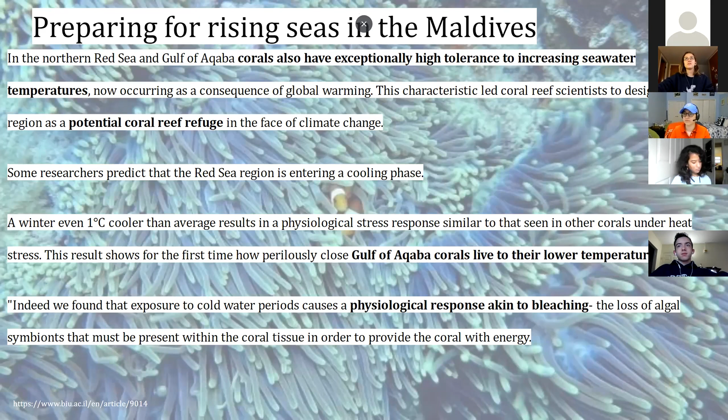So I wanted to talk about this article. They were basically talking about how climate change is affecting coral in the Red Sea. Coral is very temperature sensitive, and for the most part coral has been having a lot of issues with rising temperatures. Very slight temperature changes will cause lots of issues in the coral.

But these scientists were studying a specific area in the Red Sea where coral has a much higher upper temperature limit. They're much more resistant to temperature change. So they were doing testing on this, and they found that this coral had adapted to these higher temperatures. But now if the temperature drops even a single degree Celsius, that would cause something called bleaching of the coral, which basically doesn't allow the coral to absorb energy.

And they were saying this is an issue because, obviously, climate change is not just global warming, it's global weather changes, it's more erratic weather. So there's a higher chance of much warmer and also much cooler temperatures. They were pointing this out as an issue for this potential refuge, as they referred to it, for coral.

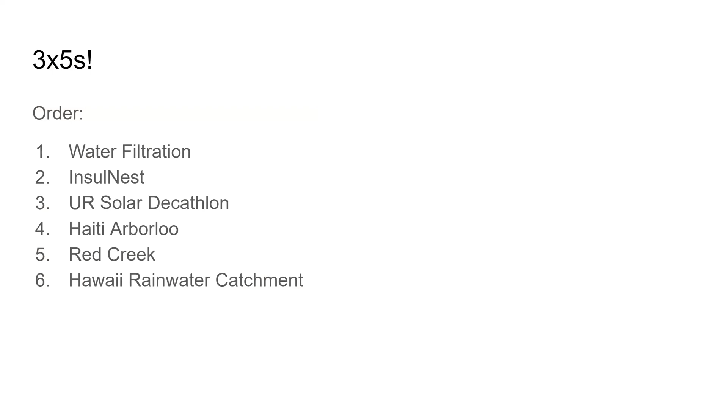Okay, hi, so this is the project for water filtration. Next slide.

So basically a brief overview, I went over last time as well. We're partnered with TAM Ceramics to create a water filter suitable for household use. The desired flow rate is 2 liters per hour, and we want the consumer product to ultimately be less than $10. TAM Ceramics gives us the filter media, and the company itself is promoting safe drinking water in nations that necessarily don't really have that resource.

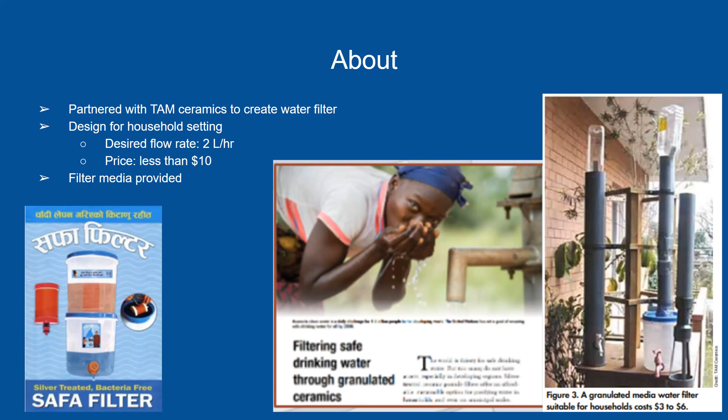Next slide. So progress so far is that we've finalized an initial design that we're using. I managed to actually get to the storage unit and get some of the materials we had last semester, which is the middle picture. I'm in the process of waiting for some materials to arrive to do some more testing. The picture on the right is a method to hold the filter media, which is the bag right there, to contain it and be able to filter water out. And the picture on the left is the mesh screen that we're going to purchase. Next slide.

Yeah, I did want to ask, going back a slide, what's the sizing of your mesh? Because that looks pretty darn small. Yeah, it's 120, it's really small. The stakeholders specified that it had to be 100 mesh or less, and the nearest one we could find was 120. 100 mesh they didn't sell, and we couldn't do anything like 90 mesh and stuff, or else the filter media would leak through.

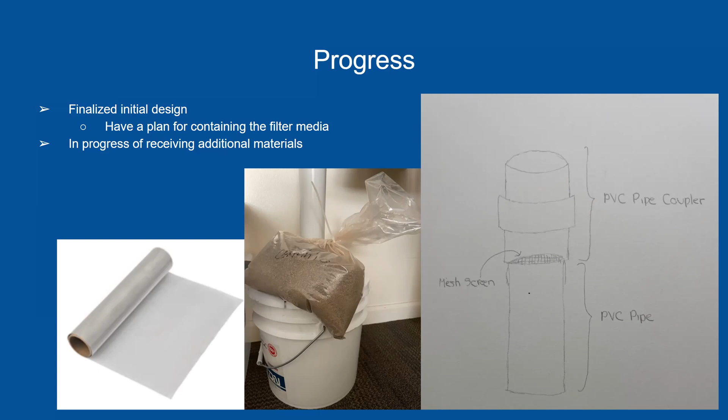Hello, can you hear me all right? Yep, you're good. All right, cool. Hey guys, InsulNest, I think I'm the only one who's here that's on the team.

Anyways, if you're unfamiliar with the project, we are trying to make sustainable organic building thermal insulation material. So the current iteration of the project is focusing on mycelium, which is the root structure of mushrooms. With mycelium, it's basically a network of mushroom fiber growing and bonding whatever your substrate is. In this case, we're using hemp pulp.

As you can see in the middle, towards the bottom, that's one of our samples. On the right, you can see we were processing one of our samples. We tried to light it on fire, because it's organic it does tend to burn a little bit more easily than things like fiberglass. So we tried to light it on fire, it doesn't want to burn. It sort of self-extinguishes, but it still would char. We also tried to laser cut it, so it would char and smoke, so a little bit of room for improvement there. We ended up just band sawing the edges off to make a uniform rectangular shape for testing.

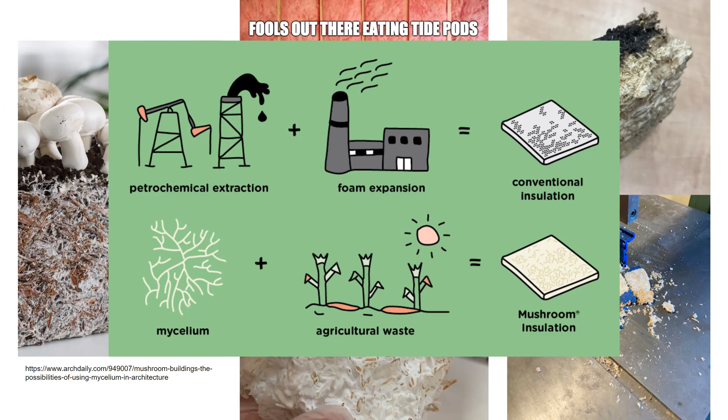All right, so we wanted to figure out the thermal conductivity of our material, of our sample, to really figure out how good it is as an insulation material. So on the left, you can see this theory, the derived formula for the thermal conductivity as a function of the heat rate, thickness of the material, the area of that material, and the temperature change.

The picture in the middle is our team, part of our team, and then our actual setup, which is the physical execution of this schematic on the right.

So heat flows from hot to cold. In this case, from the hot plate, which is 100 degrees, to the cold water, which is roughly at like 25.

So we just waited for everything to reach steady state, so we can have a one-dimensional steady state thermal resistance analysis. It sounds more complicated than it is. So the math is kind of simple.

We were able to back out the thermal conductivity of our material with the help of a reference material with a known resistance value. In this case, it's foam board, which has a thermal conductivity pretty much the same as air. So the thermal conductivity of our material is about 0.03, almost exactly 0.03.

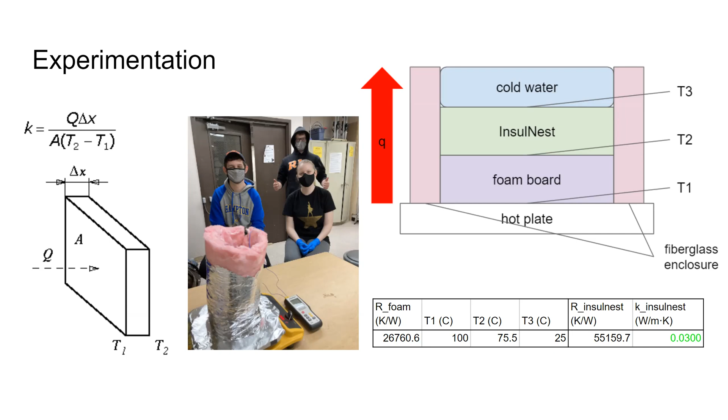So how good is that? For reference, could you go to the next slide? A lot of the insulation materials on the market have a thermal conductivity of 0.04, more or less.

So this is to say that our material actually performs better than a lot of the stuff out there. But our material costs under $20 to make, so instead of a whole factory, it can be made pretty much in a DIY setting. So the cheapness of that, the ease of production makes us stand out in applications like warmer countries with not as much economic power to mass produce foam insulation.

Or like the chemical sort of insulation, they can have that, or countries where buildings are knocked down by natural disasters a lot. So because of that cheapness of production, you can replace your foam insulation with this type of material, which, although it's not as fire retardant, is a lot cheaper to make and a lot better for the environment.

So we did a little bit of analysis to figure out what if we can add an air pocket to it, modeling the air pocket basically as a solid and using the thermal conductivity of air, assuming that there's no convection. Now, of course, convection is going to kick in the bigger the air pocket grows.

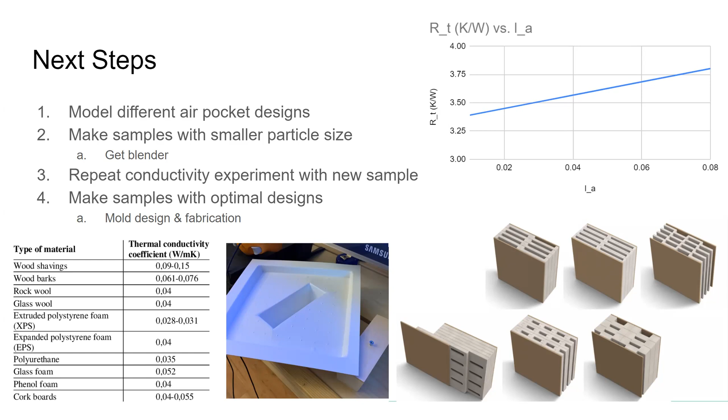Thank you guys for coming tonight. Hey, thanks for having us.

So yeah, this is the University of Rochester Solar Decathlon Design Challenge presentation. I'm Avni, a U of R student, and I'm joined by Humphrey Kimani, another U of R student and team member. Our design is You Are Home, and we partnered with Habitat for Humanity International and our local chapter in Rochester, Flower City Habitat for Humanity, to modify one of the standard designs into You Are Home.

Next slide please. So we first had to determine the target market, and it lies at the Josana neighborhood, that's where Flower City Habitat often builds homes. So we designed a 4-bedroom house, intended for up to 5 occupants. During the design, our main goals were simplicity, affordability, and sustainability and energy efficiency.

Simplicity in the sense that we had to make sure the design can be built by volunteers, because our partner, Flower City Habitat, normally deals with volunteers building everything from scratch. So we wanted to make that as simple as possible, and all rooms and main living areas should be designed with a lot of space so that wheelchairs can move freely.

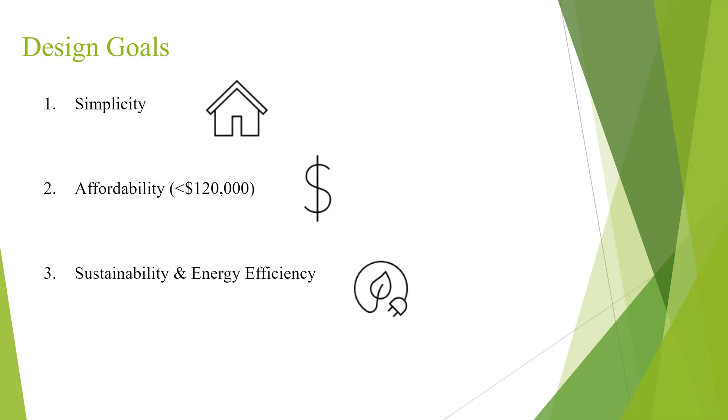So we employed a decision matrix to help us pick the most sustainable materials for those parameters.

The original design had hot water fixtures spread throughout the house, and by moving the bathrooms closer to the hot water heater, we minimized the heat losses associated with water traveling to fixtures spread throughout the house, therefore minimizing the energy demand of the home.

Next slide. So to conclude, UR Home gave a HERS score of around 40 without the renewable energy system, and 10 with an on-site solar system.

Primarily, our design had a community-based solar idea in mind. However, because we used Ekotrope software and that parameter cannot be embedded in it, we just had to use on-site solar, which gave us a higher score of 10. We anticipate the score could be much lower than that because community-based solar has proven to be even more effective than on-site solar.

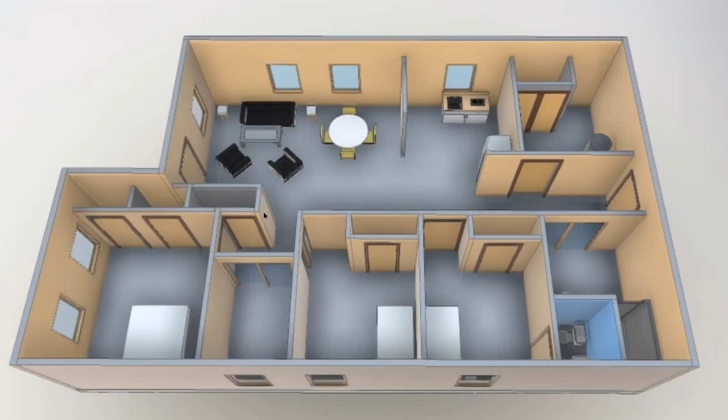Hi guys, I don't know what's going on with my font there, but that's okay. I'm Renee, I'm the project leader for Haiti Arborloo, and I'm going to tell you some updates that we have with it.

So basically, we created this sustainable, affordable, collapsible latrine system for rural parts of Haiti, so that we don't have to build something that withstands natural disasters, we have something that can avoid natural disasters. Right now there's a problem where the systems that they currently have are being destroyed by natural disasters, and it's too expensive to rebuild them afterwards, so this is our solution that we've come up with here.

Right now we're working on some concrete testing still. We did set up a lot of molds at the end of last semester with hopes that we would be able to test out those different compositions this semester, but it turns out they didn't set correctly when we pulled them out from the lab. So we still need to get some new testing materials in order to test them again and find a time that works for everyone, so we're kind of on pause with this one right now.

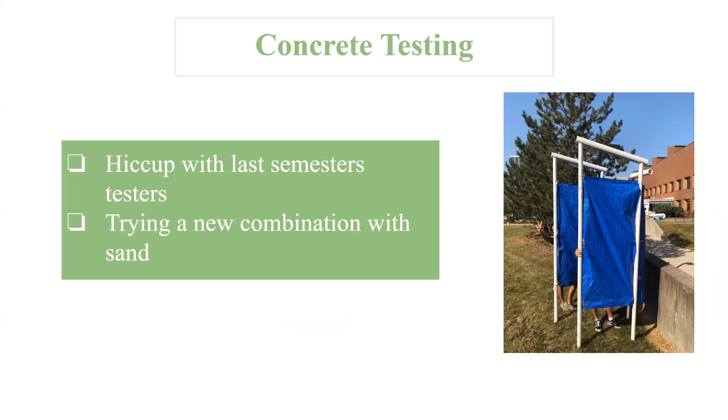Actually, I want to go back and look. Do you guys have... I don't see the door here. I know you guys have done that though. I'm curious about the hook. Can you see my mouse? Yes, I can. I'm curious how you did the hook, what material that is going to be made out of.

So we figured out a way that we could make it out of bamboo for the design in Haiti, but for the prototype that we built here, I believe we just used a metal S hook, and we were able to drill it into the PVC. On the other side we put in an eyelet because we couldn't drill into the PVC the way we wanted to. So that's how we're compensating for it with our materials here.

Gotcha. All right, any other questions?

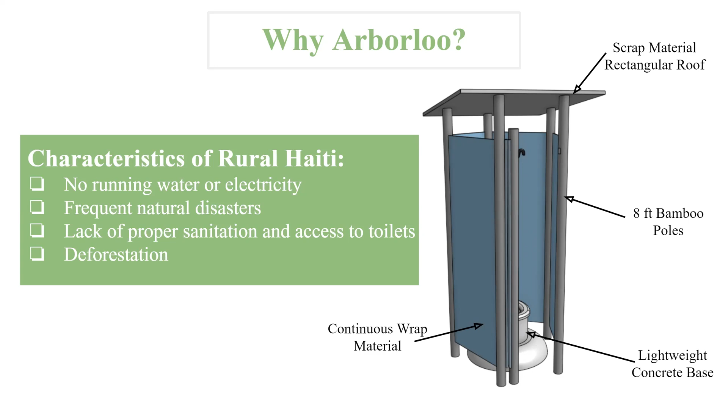I don't know if this is Kylie or Miles. Kylie's not here, so I'll be presenting.

So the background for our project is the Red Creek runoff behind K-Lot, which is a lot for students behind residence halls. It basically gets polluted by cars parking there and road salt that gets put in the lot as well.

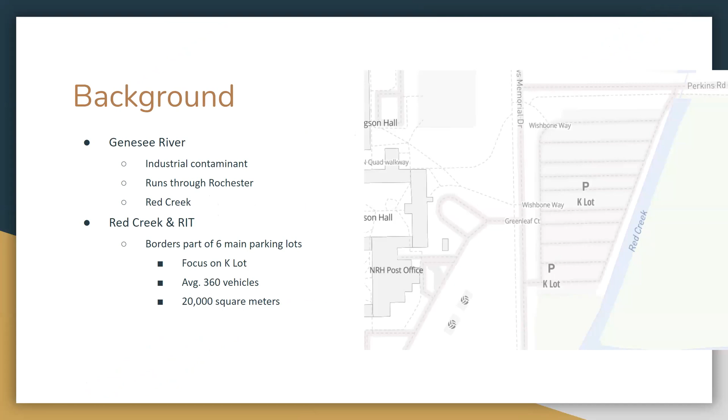So we're trying to find ways of reducing the pollutants that get into the Red Creek. Currently we're researching bioswales and roadside alternatives, and recently we've compiled a basic list of supplies for each layer of the bioswale, which consists of native plants to Rochester, types of mulch we could use, soil, gravel, piping, and drywells, and costs and alternatives for those.

And I took some videos and pictures of some bioswales that are already up near UC for stuff to build off of, and we could use that for inspiration. Then for the road salt alternatives, we found over 5 alternatives, and we're working on narrowing down the top 3.

Moving forward, we want to finalize our research of the bioswales and continue to research the top 3 alternatives for the salt, really break down the cost in time and money of those, and then contact the groundskeepers to inquire about the bioswale installations near Perkins as well. So that would be of interest to us.

I'm curious, you were talking about road salt issues. Do you know what is the biggest issue with road salt in the water? Do you know what that actually causes?

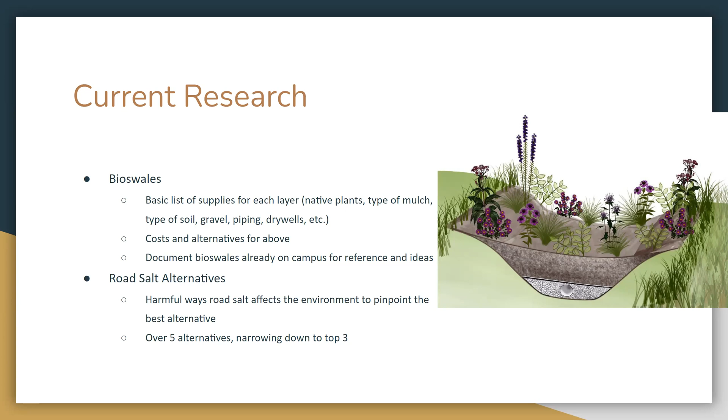Okay, next up is me, actually. So yeah, I'm going to update you guys on what we've been talking about.

So just as a reminder of the background of our project, we are building a rainwater catchment system to provide water to a community garden of a nonprofit in the dry season. The requirements are it must have a maximum square footage of 100 square feet.

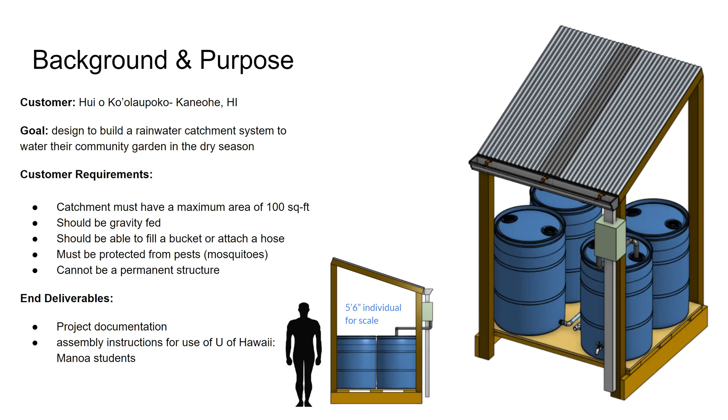We want it to be protected from pests like mosquitoes, and we don't want this to be a permanent structure. We need to be able to disassemble this pretty easily. Our end deliverables are solid project documentation and assembly instructions for the University of Hawaii students.

So some updates, and Catherine, jump in if I miss anything. We added a couple things. We added a support plywood to the base there. That middle piece of wood wasn't there before, and we wanted to add that just to hold up the other planks. We went from 3 plywood panels to 2 panels as the base. We also decided on the corners on the ends of these pillars.

Before we had 6-inch wood screws keeping those together, and we decided to go forward with carriage bolts instead. We felt that would be easier for assembly and disassembly, because you just pull out quite a few carriage bolts, and you have a separate base and roof pieces, and then you have these 4 pillars.

It would be relatively easy to take down. We are also changing a couple things on the roofing. We added the supports for the roofing panels. Our customer requested that we shorten it a bit, because they've had issues with people coming and taking stuff, so they wanted to make sure this was not visible from the nearby road. I think we took a whole foot off of the height.

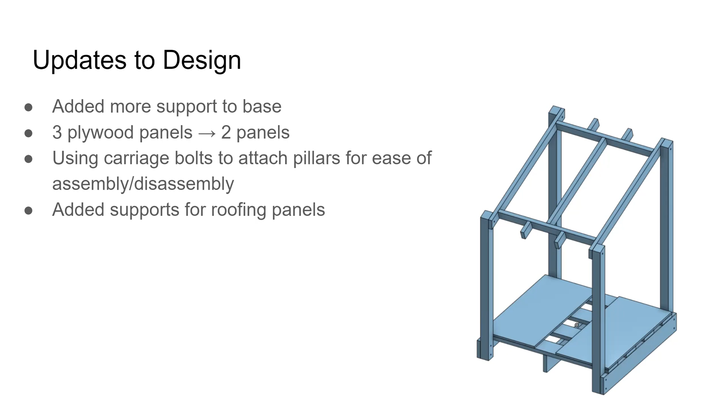Yeah, I think it's definitely brought to light how in tune you can be with a project, and then trying to explain it to other people when you're not going to be there for build day. I know Arborloo has absolutely run into this. There's an additional language barrier there, but you have to be very precise with all of this, and it's easy when you're going through it in your own mind or talking to your teammates to breeze over things that aren't as intuitive to others. Yeah, it's like: attach part number 750, 1.36 inches away from the end of part 56.